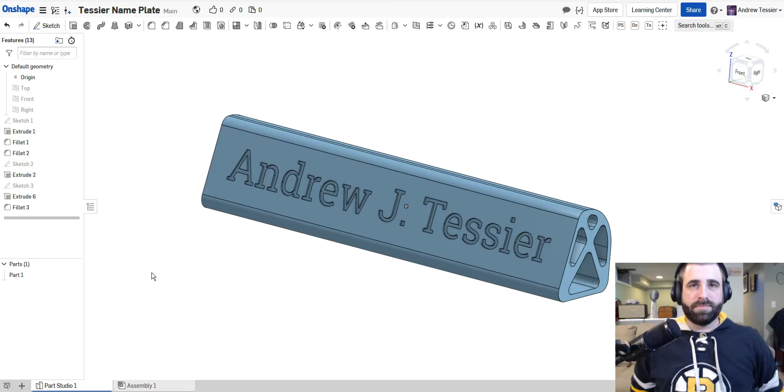Hey everyone, so here is my nameplate. I just want to give you a quick rundown of how I made it. I won't walk you through quite as step by step as the extrusion practice piece, but I want to show you roughly what's going on here and some things you need to keep an eye out for when designing for 3D printing.

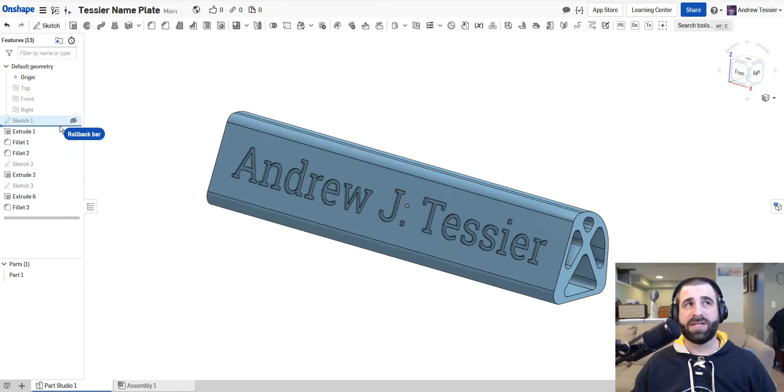This rollback bar here is kind of like your time machine. You can pull it back and forth to go back to what you had done at the beginning. So I'm going to do that to walk you through how I made this part.

First we started off with this sketch, which by the criteria meant the side profile had to fit within a 4 centimeter by 4 centimeter block. So I did this, and you should do something similar. You don't have to make it as boxy as mine, but you definitely want a flat angled side here, for where your name's going to be engraved on.

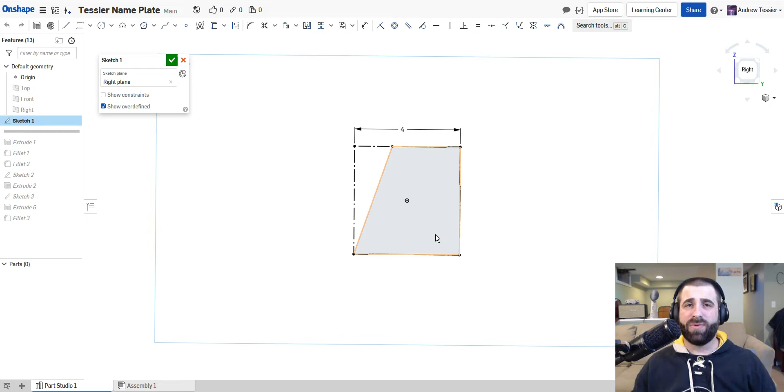That way when you put it down on the table, it's kind of facing up at people, so they don't have to get down and squint to see it. You want it angled back a bit. That's how you see most nameplates. It doesn't have to be much, it could be slight, even just a little bit like this is fine too.

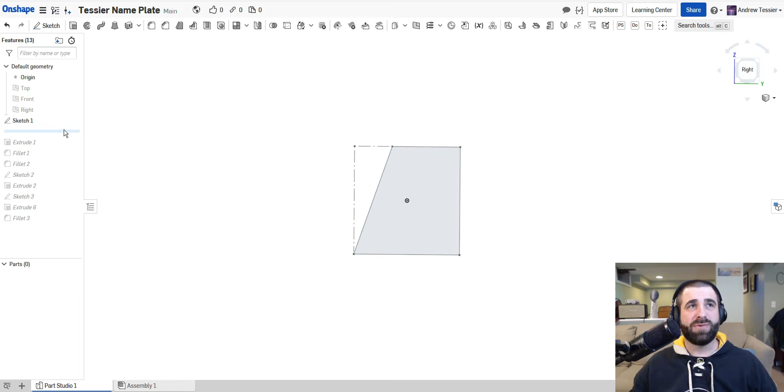But I'm going to Control Z that so it doesn't mess everything up. So I took that and extruded mid-plane. You can tell I extruded mid-plane because when I select the sketch, you can see it is in the middle of the piece. So I extruded it 20 centimeters that way.

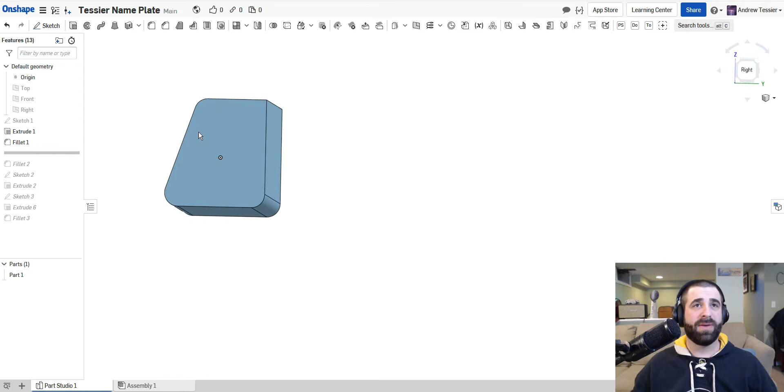Then I didn't like the boxiness of it, so I did some fillets, and you should do some fillets or chamfering as well. I filleted these three with the same radius, and then I wanted kind of a big one on the back, so I did it that way. Don't put a huge one on the bottom here.

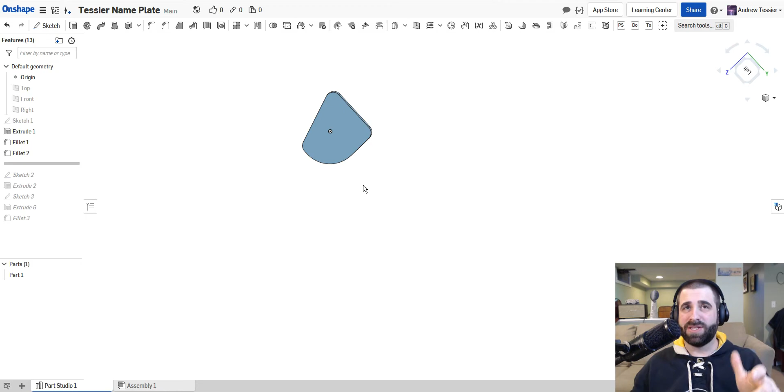I originally had that, making something like this, and it's not horrible. The way mine is set up right now, there's a lot of weight back here, so it might roll over, not as much as I want, but you could experiment with that rolling bottom. If you wanted it to sit so it could rock back and forth, you could totally do that. Just be careful with what you do.

I might give you some feedback on that. I might even try printing it out first and then say, nope, doesn't stand up, go fix it, and you can make it again. Or just tweak it again, no big deal.

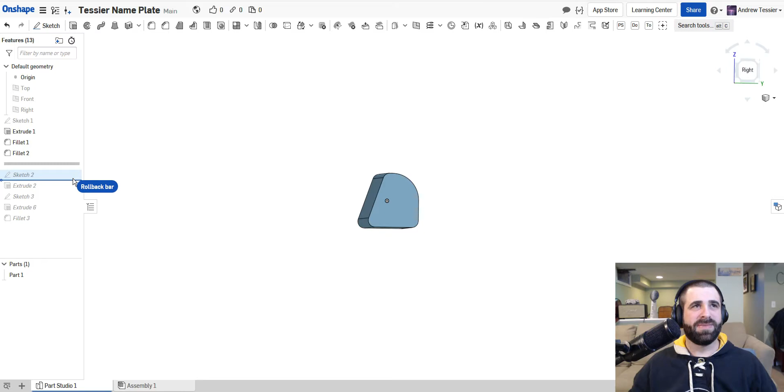So then I took this profile sketch here. What I did was I basically offset the outer edge to get this inner one. I originally cut it all the way through, but then I decided I wanted a little more beef in there, I didn't want it completely hollow, just to make it a little stronger.

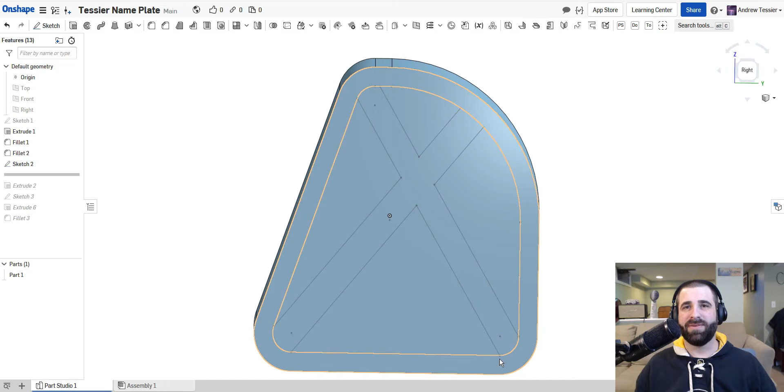So I did this X shape. The way I did it, you can see, is I basically connected this line to this line, where this arc started and this arc ended, and then did this one and connected it up to the arc, making them parallel. I did the same thing here, took this arc and went straight across randomly, and made sure that one was parallel too. You don't have to be parallel, I just like the symmetry of it.

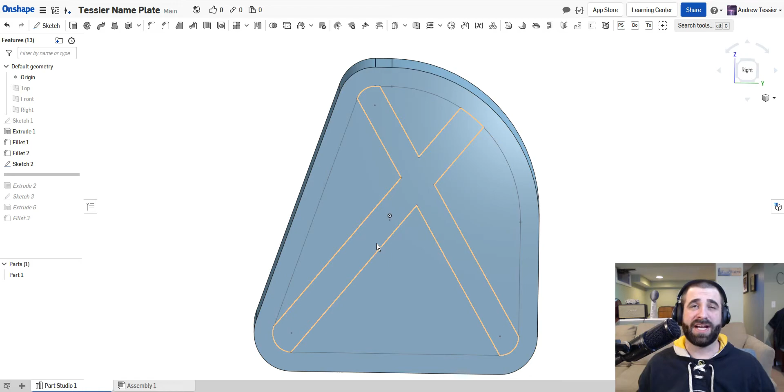So it gets this kind of big X, or like a lowercase T, kind of, if you catch my drift it also looks like an A in there. So then I extrude cut all the way through, using my through-all cut, and did that.

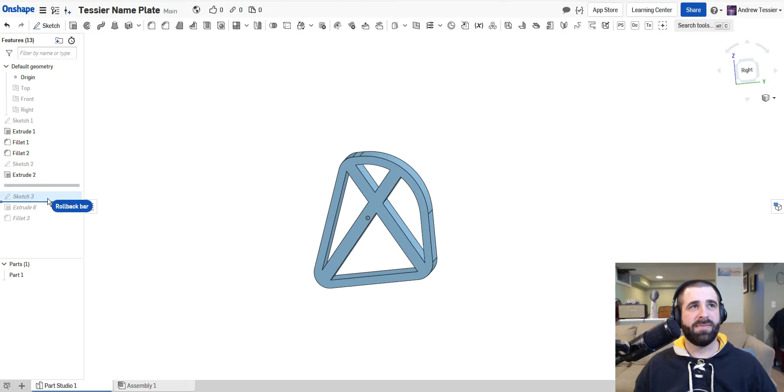And then it was time for the lettering. Now the lettering can be kind of finicky, and here's what you're going to want to do for that.

Basically, you're going to want to have, I tried to center it vertically, but you want to have about a centimeter gap on the sides here. You don't want to be butting up against it.

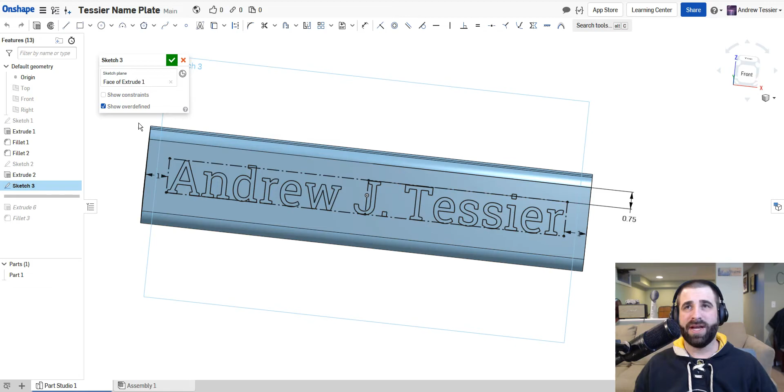So what I did is I made my rectangle with my text in it, and it ended up being kind of huge. In fact, I can just do it again using the exact same dimensions, and it should be fine. So we'll do it again real quick.

I just put a text box in here and typed Andrew J. Tessier. You don't have to use your middle initials or anything like that, I just kind of like to because I like my middle initial. That's how I use my signature and stuff too.

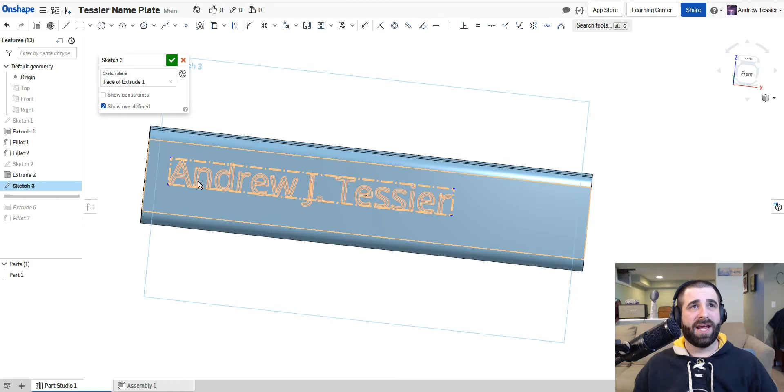So I had that, and then what I did was I just used dimensions, D for dimension, going from the side here, making sure I'm choosing that edge. Called it a centimeter.

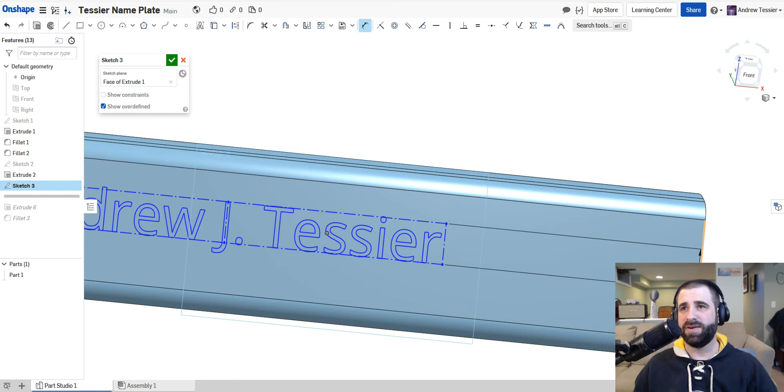I think you could probably go all the way down to about 0.3 centimeters if you got a really long name and you're kind of crammed for space here. But the closer you make it, the bigger it's allowed to get.

So if I could even, let's turn off dimensions. Let's go to 0.5, and it gets bigger. In fact, I kind of like that. I might even keep it that way.

And then I did a dimension from the top. What I could do is say this to here, this distance here, it tells me right down here in the bottom, which you can't see because my video is covering that right now. But it's telling me that that distance is about 3.18 centimeters, and the length of this is 1.7 centimeters.

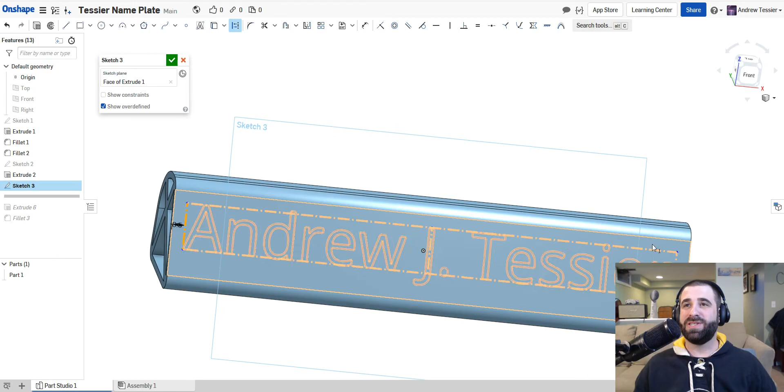So 3.18, let's call it 3.2. 3.2 minus 1.7 of this. So I've got 3.2 centimeters of total distance, and of that, 1.7 is being taken up of this. So I'm going to try to subtract in my head. 3.2 minus 1 is 2.2. Call it 22 minus 7 is what? 15? Yeah. So 2.2... nope, I'm just going to use my calculator.

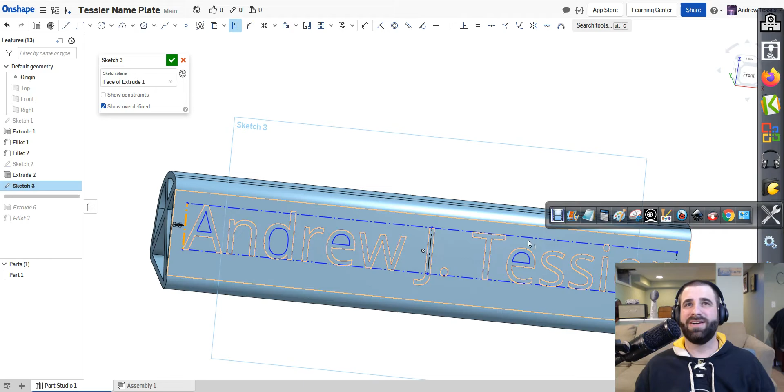There's no shame in using your calculator. There's a lot of things going on in my brain right now. I'm trying to make a video. I'm trying not to mess up. I'm trying to focus on that. I got the little guy there making noise. Who can do math at a time like that?

3.2 minus 1.7 in their brain. 1.5. So actually now it works out perfectly.

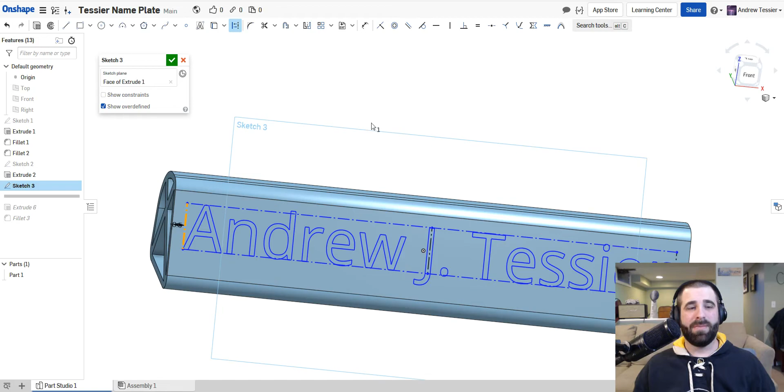So 0.75 down here, 0.75 down here should give us equal amounts. Although the J does kind of drop below the line there, so I might want to be careful of that. If I call this 0.75, that J is going to drop down there, which I don't totally like. So I'm going to give this a little bit more.

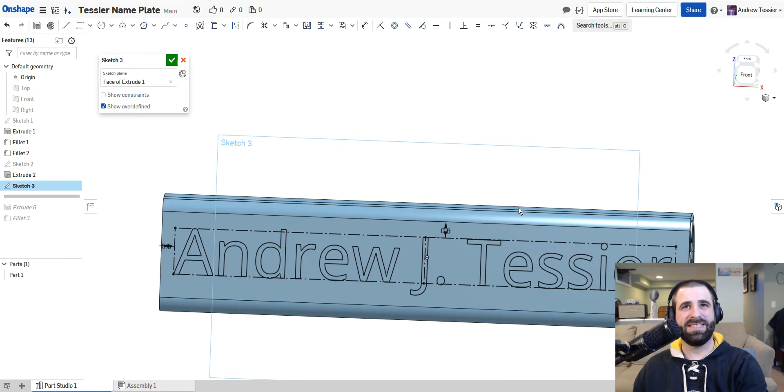I'm just going to do a little guess and check here. Let's go 0.6. And yeah, visually, no, let's go 0.65. I didn't like how close that was. Overall that gives a nice little centering feature there.

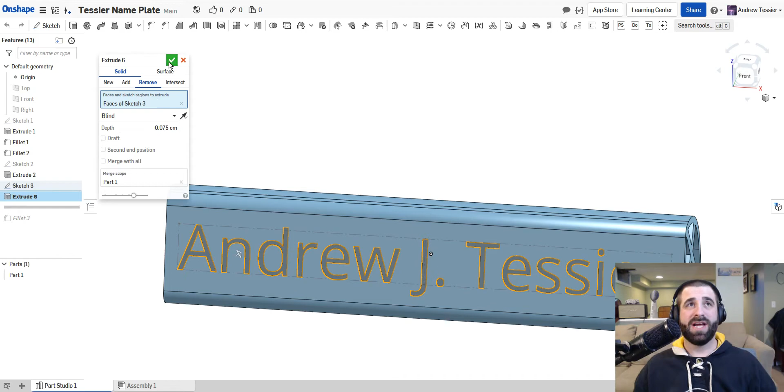And then I did an extrude cut, or extrude remove rather. Now here's the most important part: you're only going to engrave it 0.075 centimeters. Any more than that and you're going to run into trouble, because we are going to print these vertically like this, which means that all these little walls here are technically overhangs.

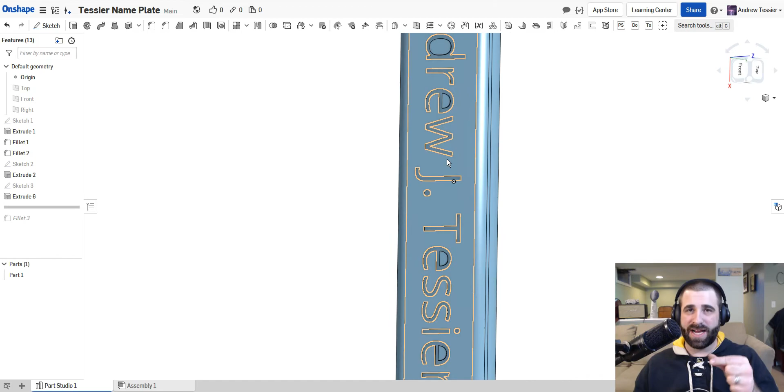Which would technically require support. But as long as you're only going a little bit, like 0.075, then you're okay. That's a small enough distance where the printer can kind of fudge that and be okay and not require you to mess up your whole print. So make sure that you don't have any engravings pushed too far in. You can't go much more than 0.075, otherwise you're going to need supports, and we don't want to do that.

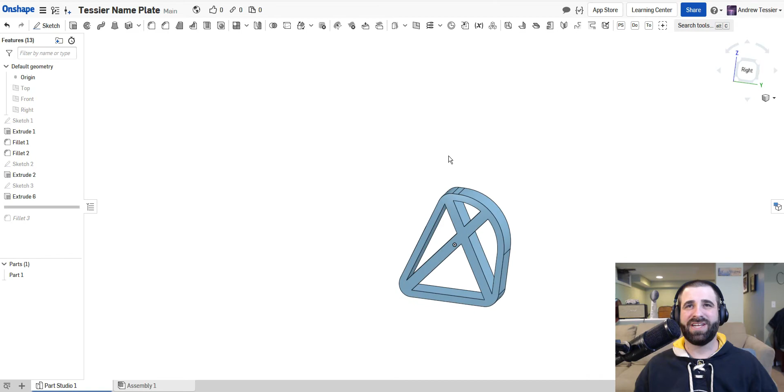And that was pretty much done, but then I looked at it and I was like, I don't really like that X, that kind of looks like crap. So I went and filleted. With one singular fillet, I just selected all the edges in there, and I just kind of did a 0.2. I just played around with the number until I liked it. Could make it bigger, could make it smaller.

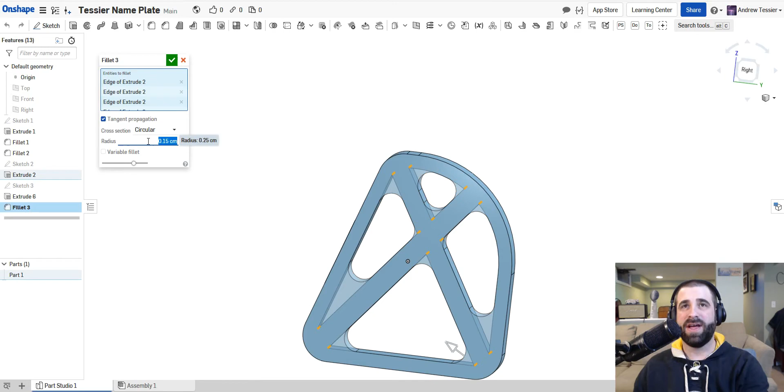The smaller you make it, I believe the bigger the gaps end up being. We can play around with that for a minute. 0.15, and the holes come out to be a little bit bigger than that. 0.2 looks like that. In fact, I kind of like 0.2 a little bit better, gives me a little bit more of that gap that I had there to begin with.

It kind of looks like an angel or something. Like the head, the body with the robe and the wings. I don't know, maybe. Kind of unintentional.

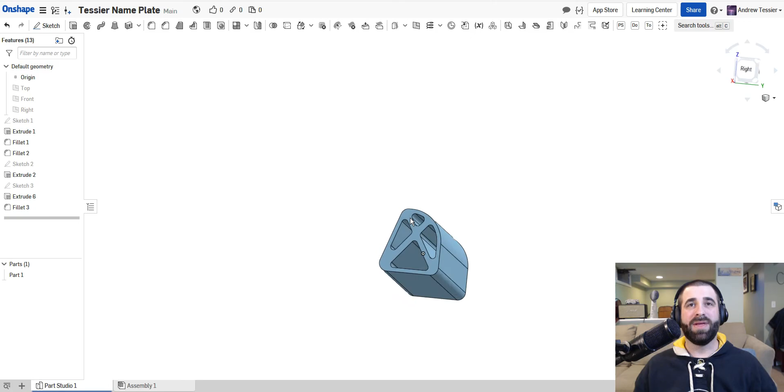But things you don't want to do: you want to keep this a nice flat surface. I technically could go here and fillet this and go like that and say, yep, sure, cool, done. Ooh, that looks kind of cool, that's nice and rounded. However, when I go to try to print that...

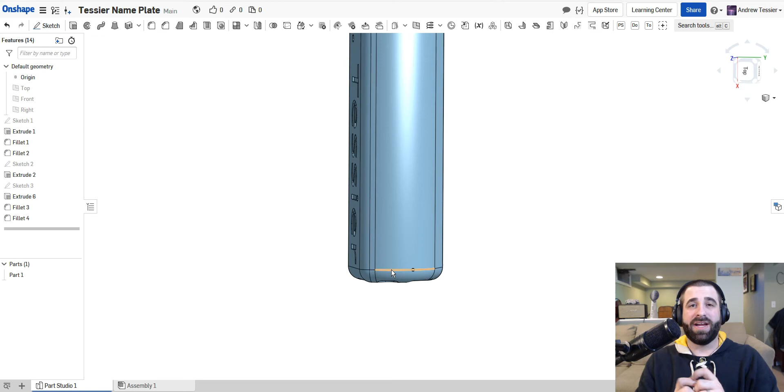Basically what you're doing now is that these rounded edges kind of cause the print to pull away from the build plate, which can, especially with something this tall and skinny, cause the whole print to just fall off the build plate, which we do not want.

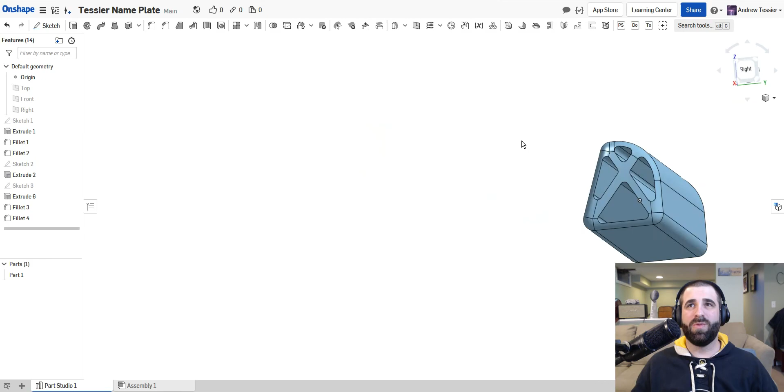So the only thing you really can't do is something like that. I mean, I guess you could do it to one side, but I don't know, to me that looks kind of funky. Doesn't look very symmetrical, and symmetry is kind of nice here. But it's kind of up to you. If you go with something more weird and abstract, that might work, but for how clean cut and symmetrical I'm making mine, that doesn't really look like it.

So just make sure that you've got a flat surface, and we are going to print these vertically like this. So just make sure that yours meets that criteria.